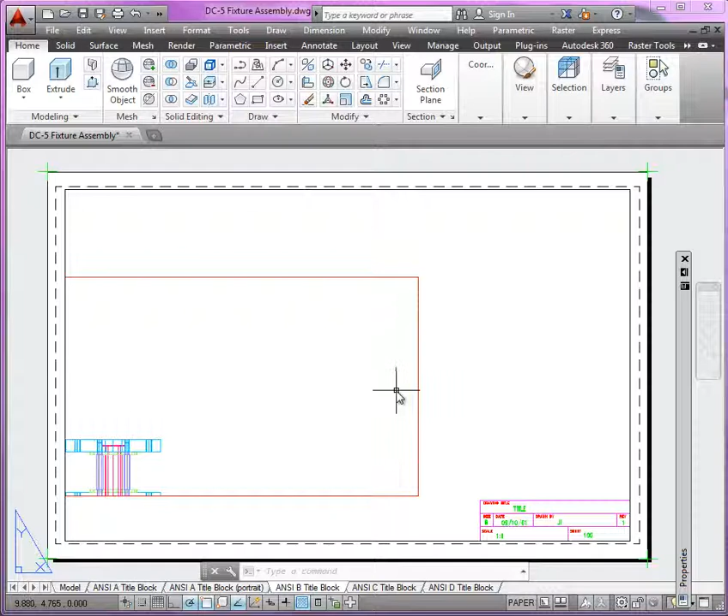So if we select that viewport, we could reposition it in the layout here. And remember, this is going to be shown as our exploded assembly view. Okay? We'll need to use solid profile to render the hidden and the visible lines and update the layer properties to attain line weight. You'll notice here too that you have two different tables, but actually they're based on the same table style. You'll notice the one for the hole tolerances, this is going to be top down. The bill of materials is going to be bottom up.

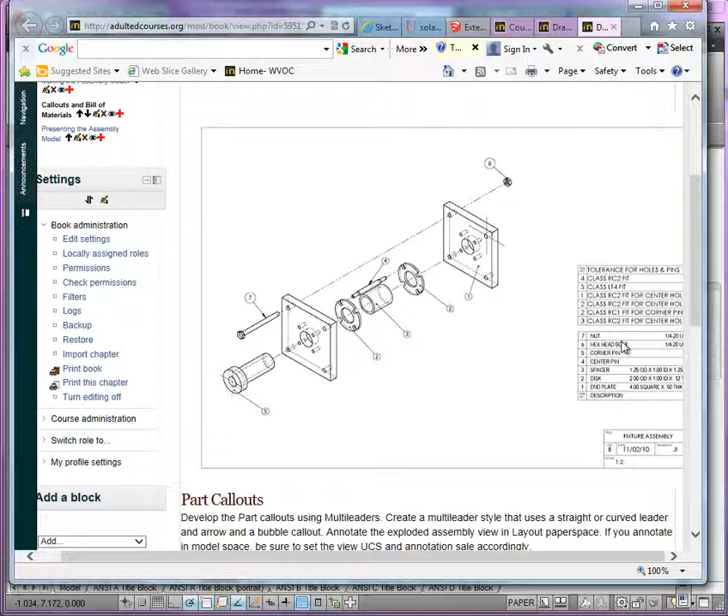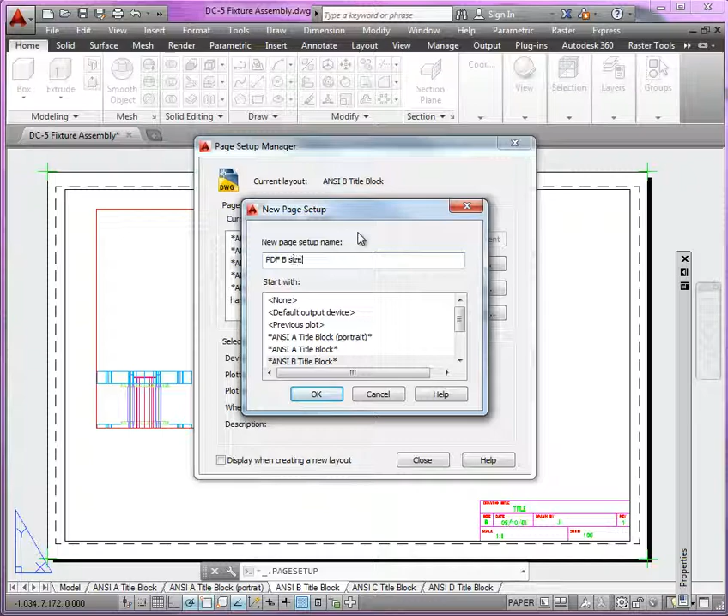All right, so let's take a look at some of the formatting that we'll need before we begin. So here I am in the B size layout. First thing I want to do is take a look at my page setup. We're going to make PDFs, so we want to make sure that we create a new page setup here. And we're going to use the DWG to PDF printer. So we'll just call this PDF B size. We'll use DWG to PDF printer.

We'll use the expanded B size, 17 by 11, extents, center of the plot, scale 1:1, and we'll want to use the HP Plotter Mono Student 2 color table. These are our class standard tables. This one allows us to print in black and white. Okay, you can also check display plot styles. This will make sense later once we've rendered the views, so we can see the line weight based on the colors that we selected for the layers.

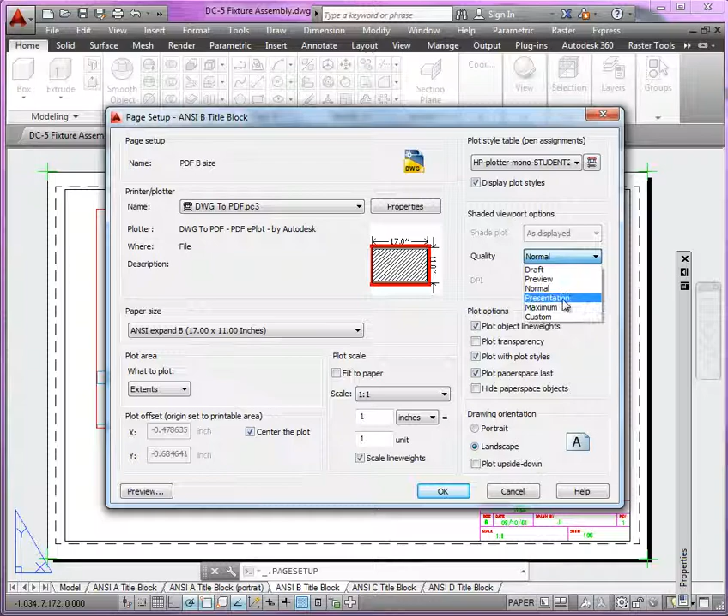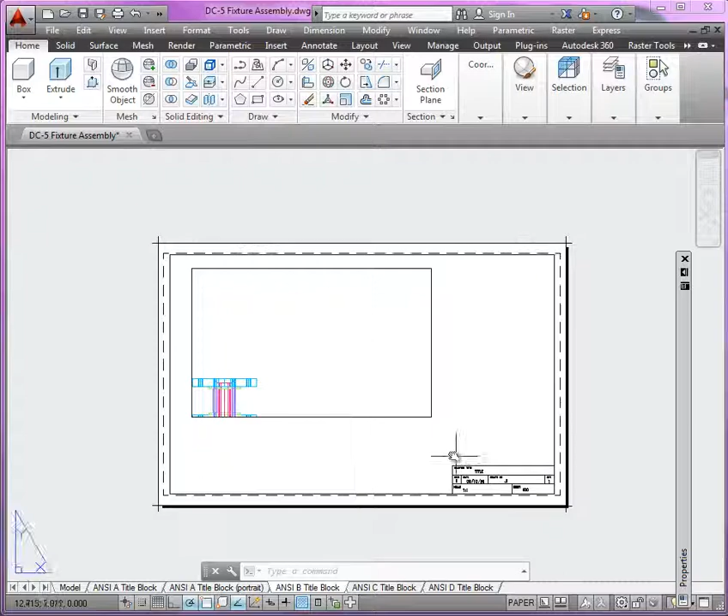The quality here, let's use presentation, and then double check your orientation. If you do a quick preview, even though you don't have anything there, you can at least verify that you have the entire title block. Right click and exit, save your page setup, set it current for the current layout selected, and close. All right, and you can see some of your layer information should be represented in black and white, as you can see there. Okay, so returning to the viewport here.

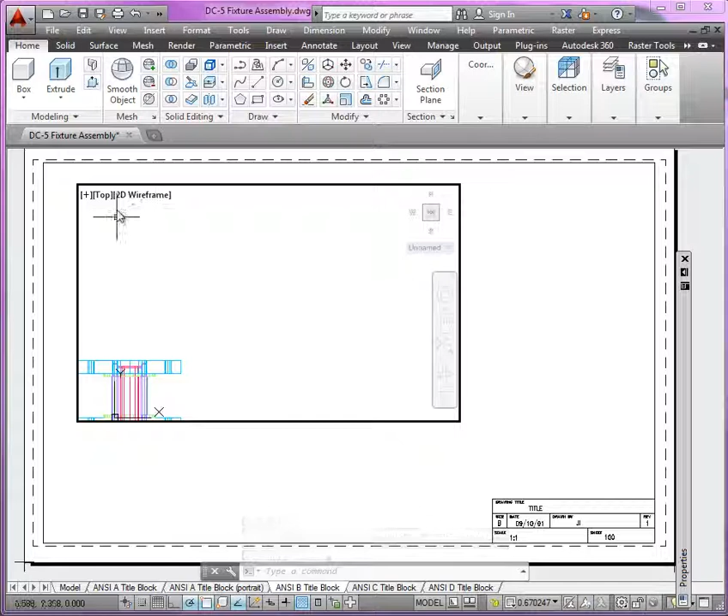All right, let's set up the view here, and then we'll come around and start working with the callouts and the tables. For our view here, what you'll want to do is double click to activate the model space. You can use your navigation wheel here, or you can use the options in the top left corner of the viewport. First, if it's easier to see it in conceptual, let's do that. And let's set up a southeast isometric view.

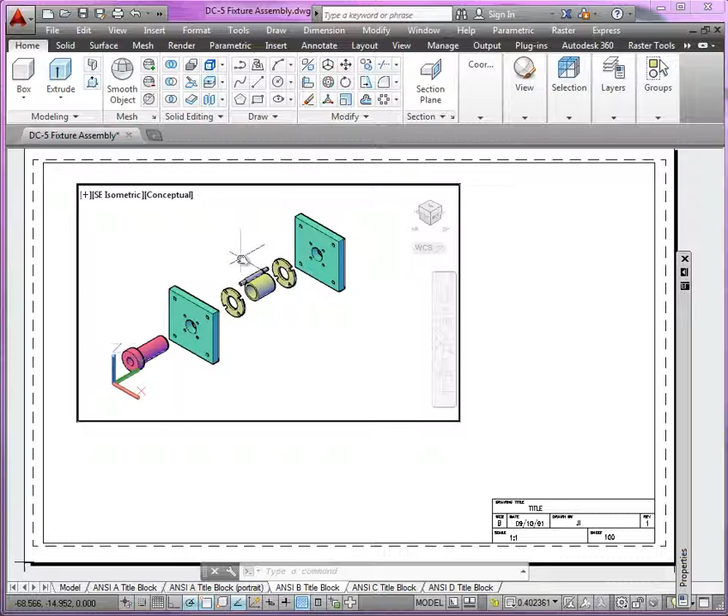Now notice it does a zoom extents, and what we want to focus on here is going to be the exploded view. Now the exploded view does not have to be to scale, but you can see here if we set it, for example, 1:1, that's a pretty big size representation. We set it 1:2, that should be adequate right there. Okay, so make sure all the layers for your model are shown here. Okay, and this will be the view.

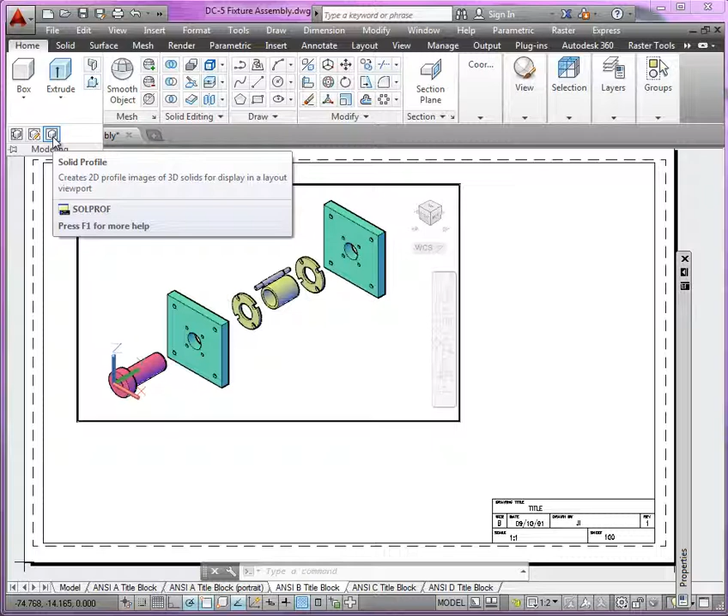In order to see the visible and hidden lines, we'll need to render the view. And we'll do that using the modeling panel, and in this case using the solid profile command. What we're able to do here is select all of the solid models, right? And keep in mind each of these is on their own respective layer. When you hit enter, take a look at the options there, and basically you're projecting all the lines, so just hit enter continuously through all of the prompts.

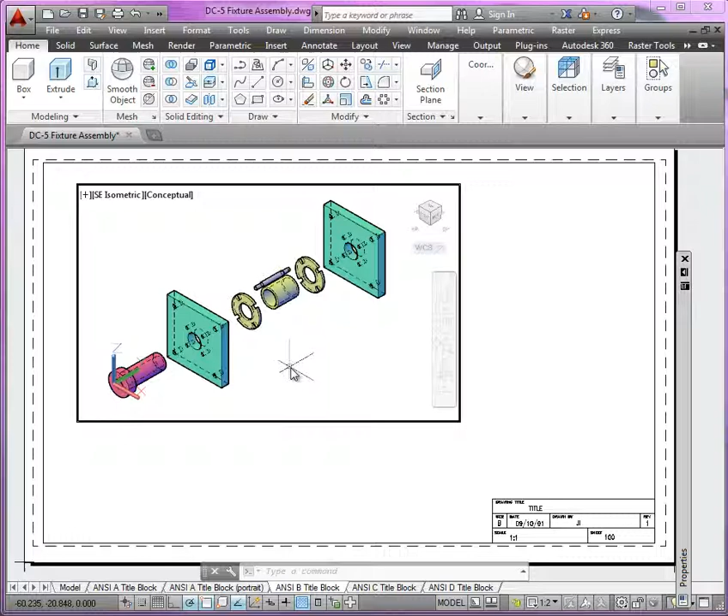Okay, now you'll see some additional line work, but in order to see it clearly you'll need to freeze the component part layers, but freeze the layers only for this viewport. Okay, so take a look at layers over here, and find those 3D component layers. You can see here's the spacer, and we'll use freeze for this current viewport only. The end plate, the disc, the corner pins, and the center pin. Okay, now I'm going to lock the viewport and zoom in.

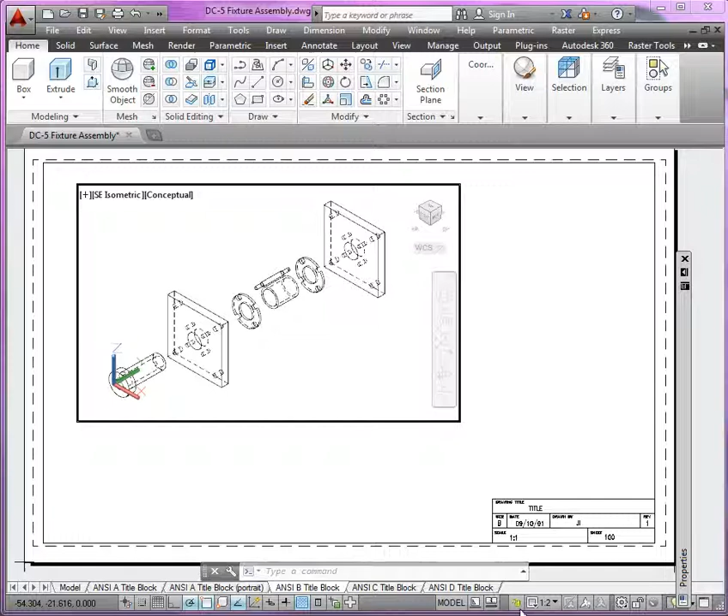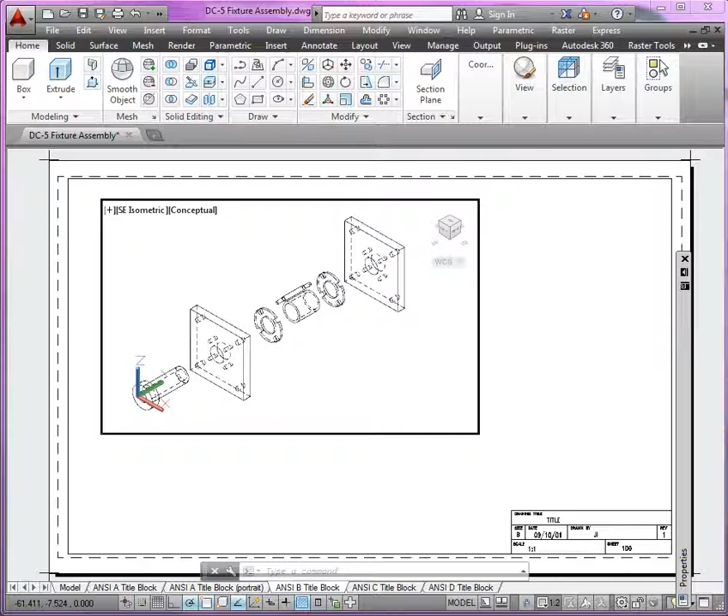Currently you will see no difference in line weight, right? And what AutoCAD has done is, if we return to layers, you can see that it's produced these PH and PV layers. If we open up our layer manager, we can work with this better. Okay, locate PH. You can see those are the hidden lines. Set that to the blue color.

Oh, where did the layers go?

Oh, there they are. Okay, and then for the PV layer, or the profile visible, set that to cyan.

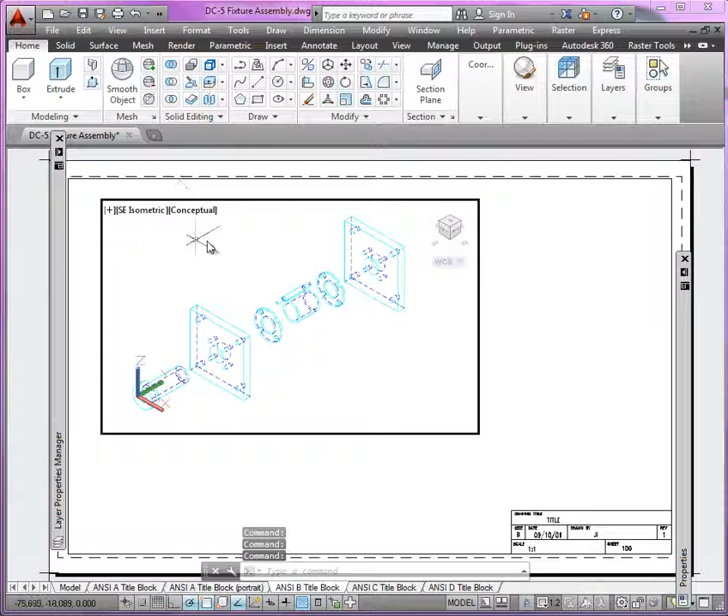Okay, now if I use view and regen all, let's try that again. View regen. Well, these should turn to black.

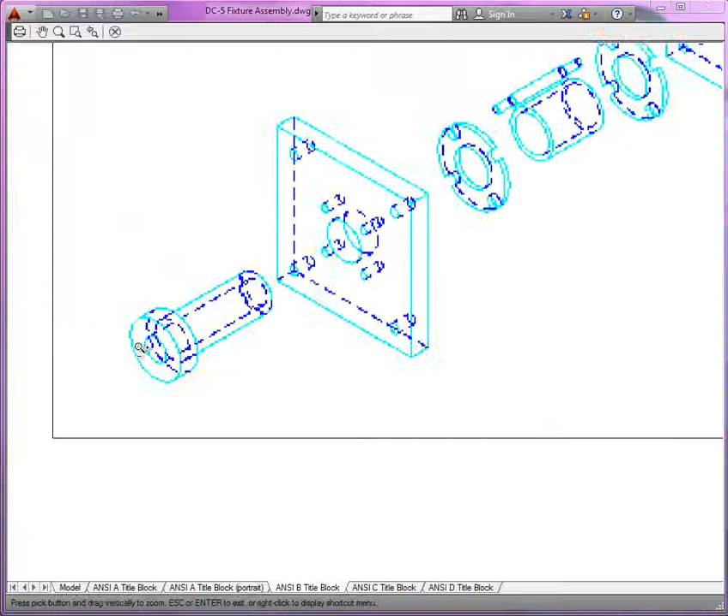Okay, we should see the line weight there. Actually, if we go to output and preview one more time, here's where we would see that. Now, if you recall, the reason why we don't see it in black and white is because if you activate the viewport here, you'll notice it's still in a 3D display style. It's conceptual, it's for 3D. You won't see your plot styles this way.

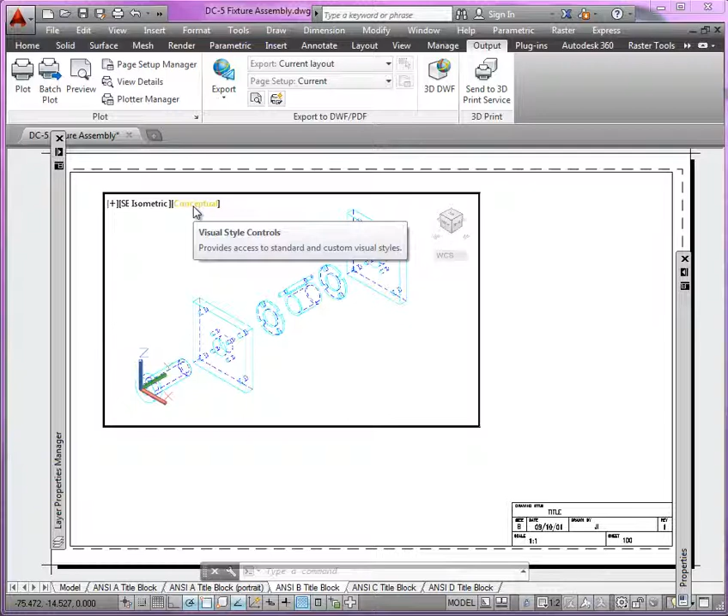So make sure we set this back to 2D wireframe. There you go. Now, if I zoom in, you'll be able to distinguish line weight based on your layer colors. That's if you have the line weight show on.

So if I zoom extents here, I can see the entire view, return to the paper space, and now we can turn our attention to formatting the multi-leader styles and also the table styles that we're going to use.

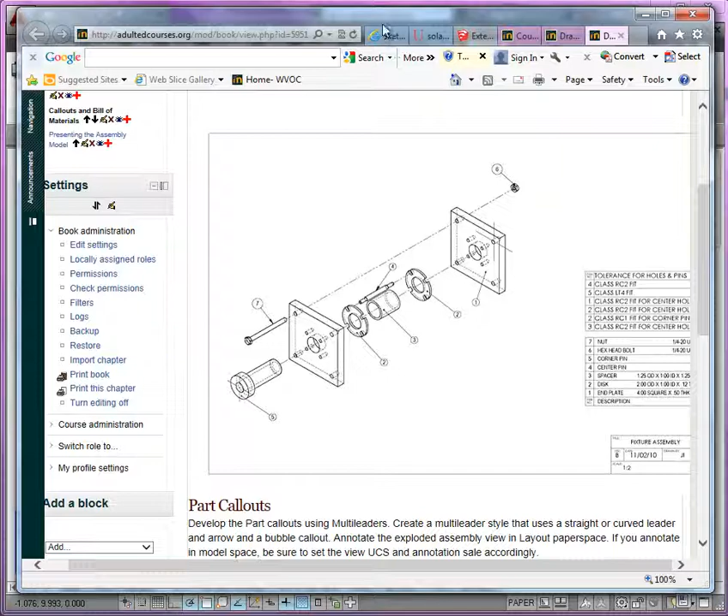For the formatting of the multi-leader style, you can see we're going to use this BOM callout, this bubble with an attribute that we can represent as numbers or letters if we like. You can see that we can show arrowheads or dots for our arrowheads. So it's really up to you, the style that you want to show. But let's take a look at the formatting for that, as well as for the tables.

Return to your Annotate tab, and you'll see your multi-leaders. Go to the multi-leader style manager. Now, one thing is this: we can create a multi-leader that we could just use in the paper space, or we could use a multi-leader that we use in either space. If we're going to use it in the model space, we've got to make sure that it's annotative.

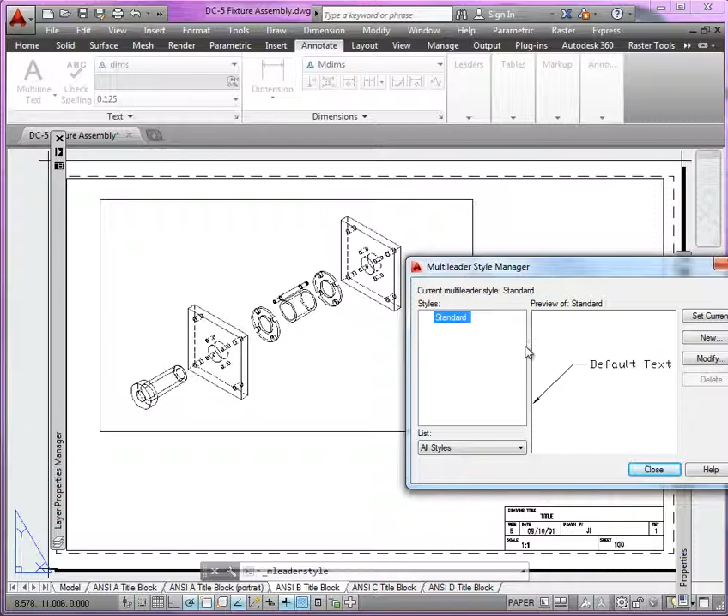So if we create a new multi-leader style, you can see here we can make it annotative. We can start with standard, that's fine, and we could call it BOM or BOM callout, and continue. Now, you'll notice we have leader format here.

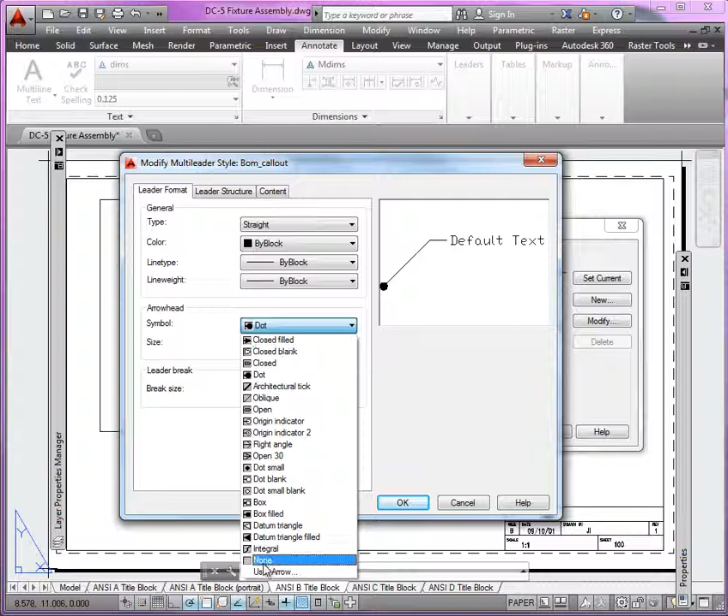You'll see we have straight, we have spline, as you can see there. And then down here, arrowhead, we have closed filled, or something like a dot, or any of these other arrowheads. Just use something that's appropriate.

You can see there's dot small, and there's dot like that. You can use the default size or adjust it as you wish. If you look at the leader structure, keep the defaults as you see here.

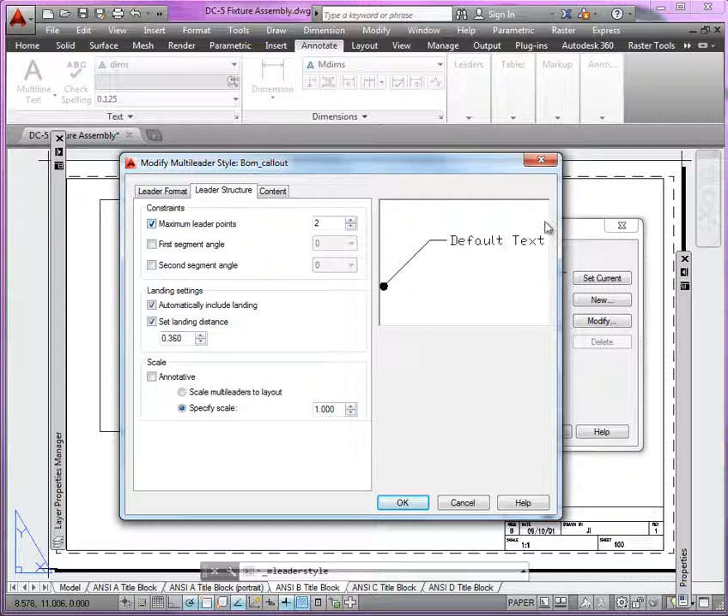We have 2 leader points, so we can pick where the leader goes, where the leader finishes, and then it'll create the bent leader line and attach what we're going to use as a block.

So for that, if you look at content, you can see here multi-leader type. Currently it's set to mtext, but what we're going to do is we're going to use a block, and now you can see your options change.

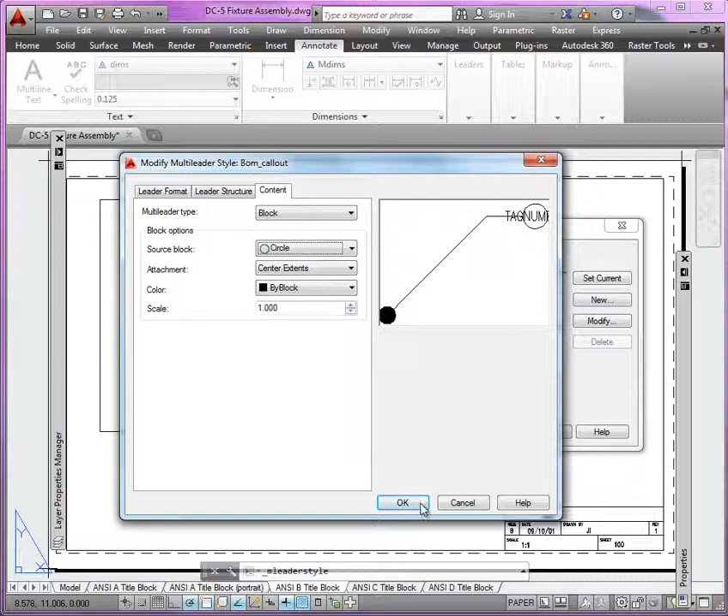If you look at source block here, what we'll be able to do is you'll have your selection here: hexagon, triangle, box. We'll use a circle. Now, these are predefined blocks with attributes. You can see there, tag number is the attribute. Alright, and we'll click OK.

And this will be our multi-leader style to call out all the parts.

Let's make sure, let's modify one more time. Let's make sure that we made it annotative, right? Let's select annotative there. Make sure it's annotative. Click OK. Now you can see the annotate symbol.

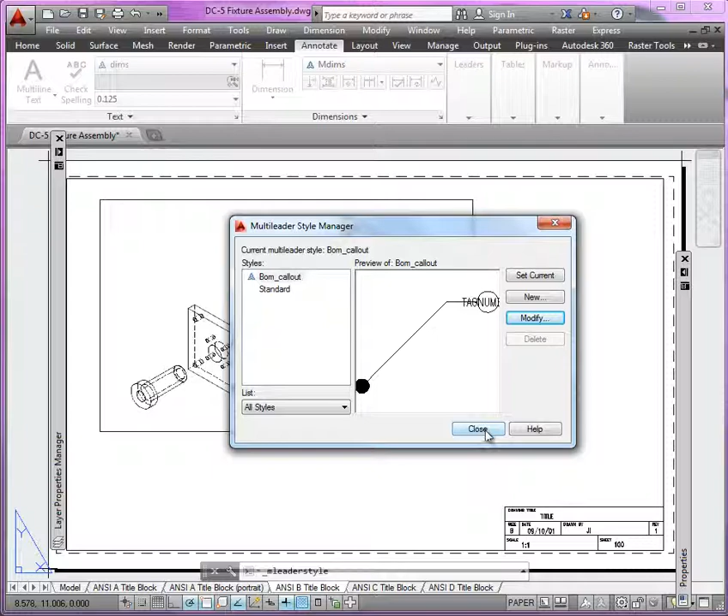All right, and close. Now, before we start doing the bubble callouts, let's go ahead and take a look at the table styles too. So, taking a look again at the Annotate tab, you can see here we only have a standard table style, but we'll take a look at the Table Style Manager.

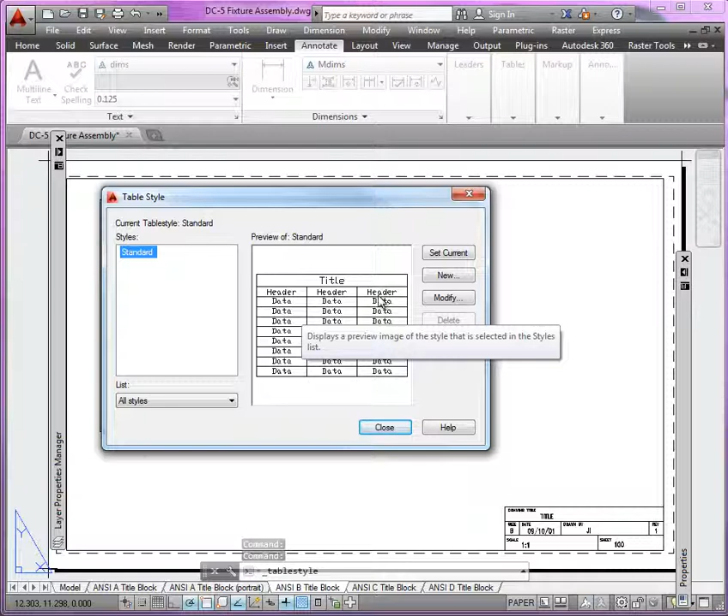And the idea here is that we're going to create a style that defines the properties for the title, the header, and the data cells for our table. So if I start with New, I'm going to call this BOM.

Okay, and continue here, and you'll see on the left side, the bottom left side here, you have a preview. Also, you'll notice here table direction. So this has to do with the style.

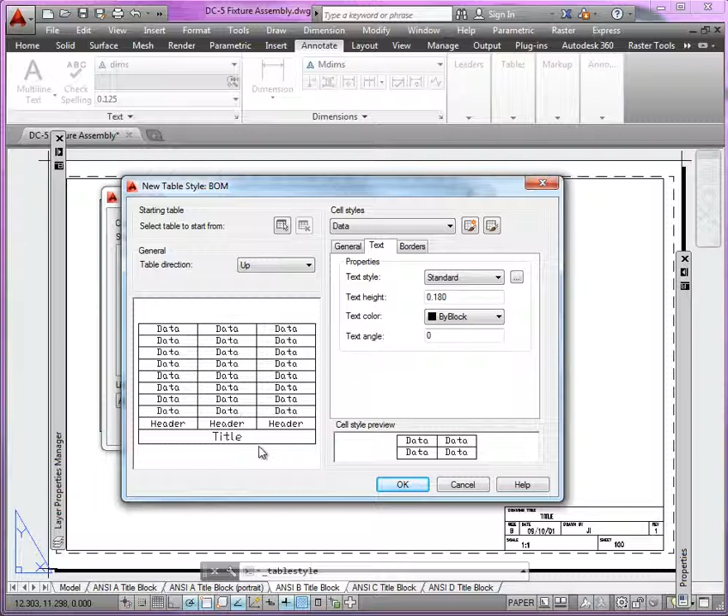You'll notice here the table direction is up or down. This is the orientation for our BOM table. It's different for our whole table. So what we could do here is use up.

Take a look at the cell styles, starting with title. Okay, we have general, text, and borders. Now, even though we're not going to use the title for either of these tables, let's just go ahead and define the properties. You'll notice here we've got alignment, middle center, the text. You can see it's just using standard.

But if you look at the options dialog button right here, this will bring us to the text style manager. This shows us all the different text styles that we have in our current model. You'll notice here, dims. Dims is a text style that is 0.125, and it's annotative, and it's using Romans.

Let's just say we wanted to create our own text style for tables. Here's what we could do: we could create a new text style. We could call it table text, for example. There's our new text style. And we could decide this is going to use Arial, for example.

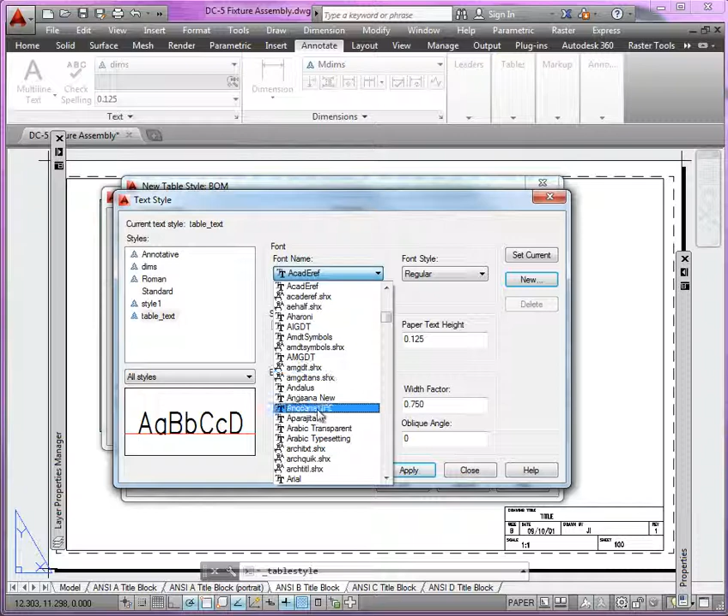So we locate Arial text style there, and we could define the paper text height as 0.125. We can do other effects here like width factor or even oblique angle. And we could create multiple text styles if we wanted them to vary for the title, the header, or the data cells.

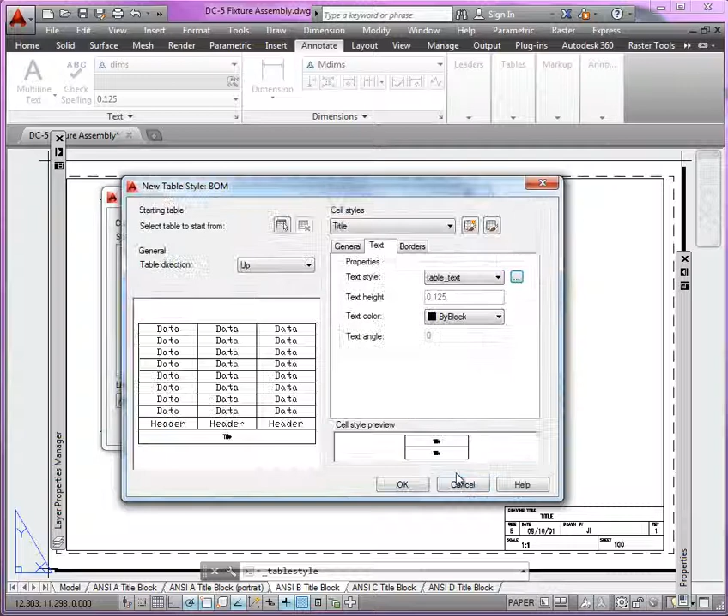But this will be just a generic text that we'll use for all aspects of the table. Once we've defined those properties, we can click Apply, Close. Now, back into our Table Style Manager here, you can see I'm in Titles, adjusting the text. You can see it's already set to Table Text.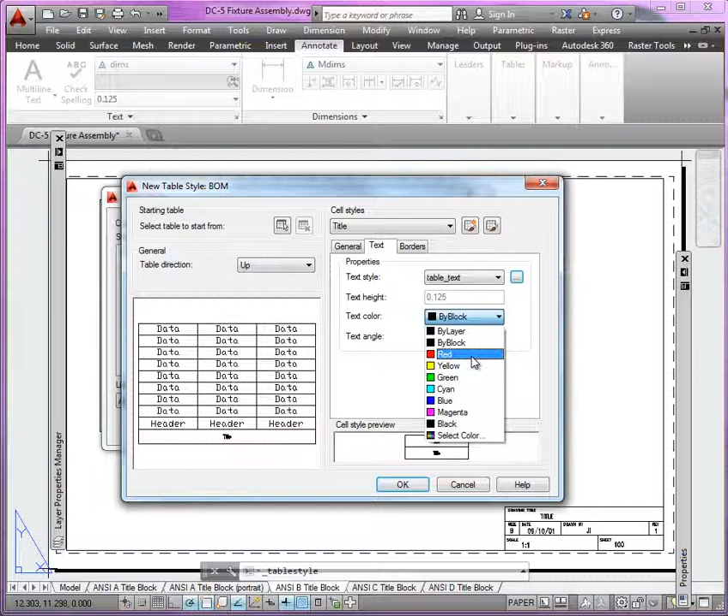And here also, we can change the color independent of the layer on which we place the table. So you could do this so that if you wanted to emphasize the text, or vice versa, wanted to emphasize the table, you can have different line weights based on the color. So here if I wanted to, I could just change it to red, really thin or light line weight, or even to something like the lighter line weights I have here with color 8 and 9.

Borders, we want all sides to be enclosed with a border. And then also you can see here you can change the color of the frame of the border independently of the layer on which the table is created.

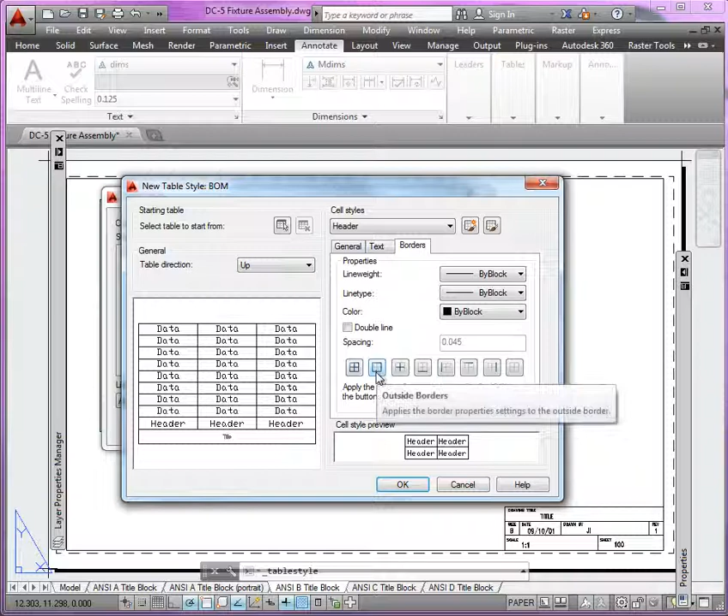So that's just title. Let's switch over to header. Once again, you can look through all of these options. Put a frame around that cell. Take a look at text, we'll use again Table Text here. General, you'll see its alignment is middle center.

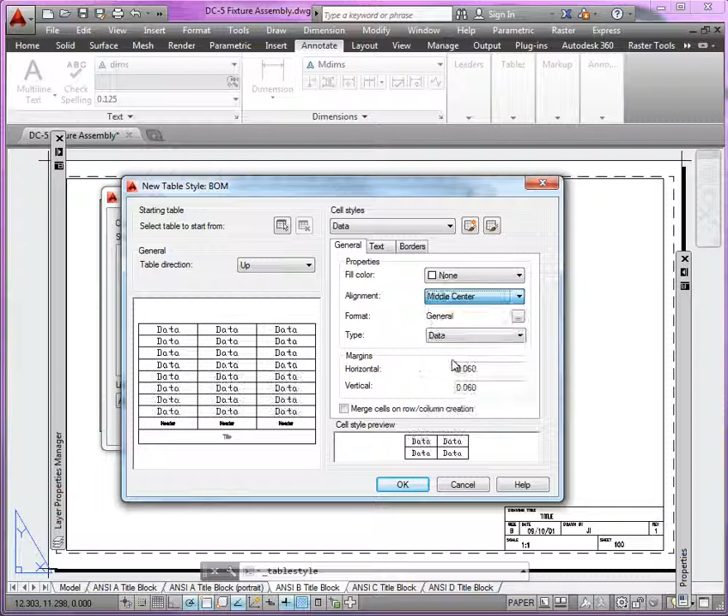We'll keep that. Switch over to data. Confirm this, we have alignment there. We'll do middle center there too. Text, we'll use Table Text. And borders here, we'll make sure that we fully enclose the cell with a frame. Okay, so this is just the table style for our BOM.

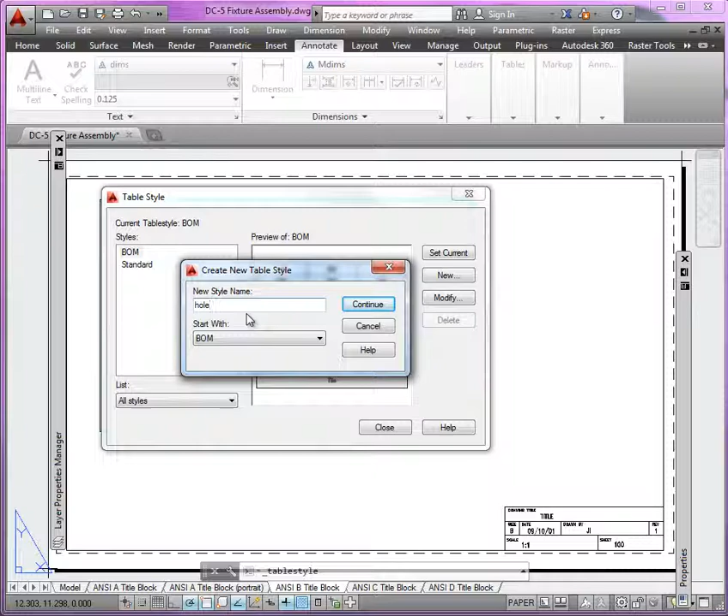If I click OK here, the only difference between that and the hole tolerance is this. Click New again. You can see we're starting with the same BOM table style, but this one I'll just call it 'hole' for the hole tolerance table. Click Continue. The only difference here is this one is set downwards, right, top down.

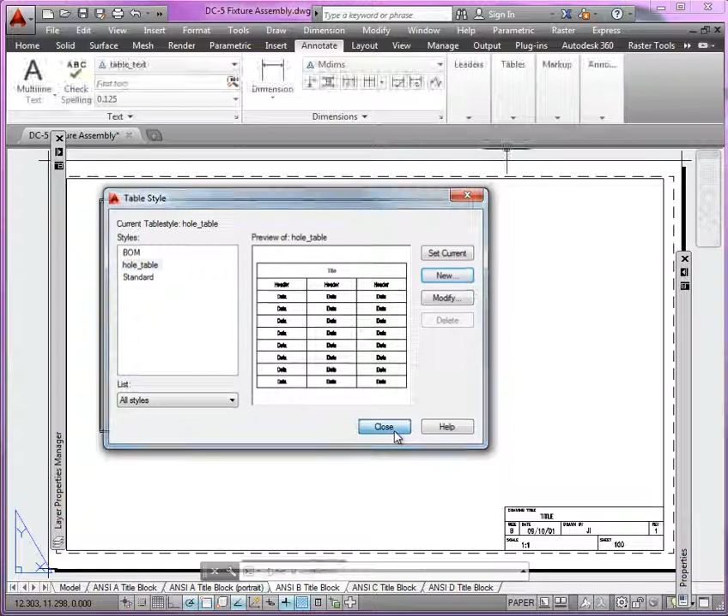So here you can click OK and proceed, just go ahead and click close, and now you can see I have in my table drop down menu both BOM and hole table, and over here in leaders I've got my BOM call out. Now we're ready to annotate.

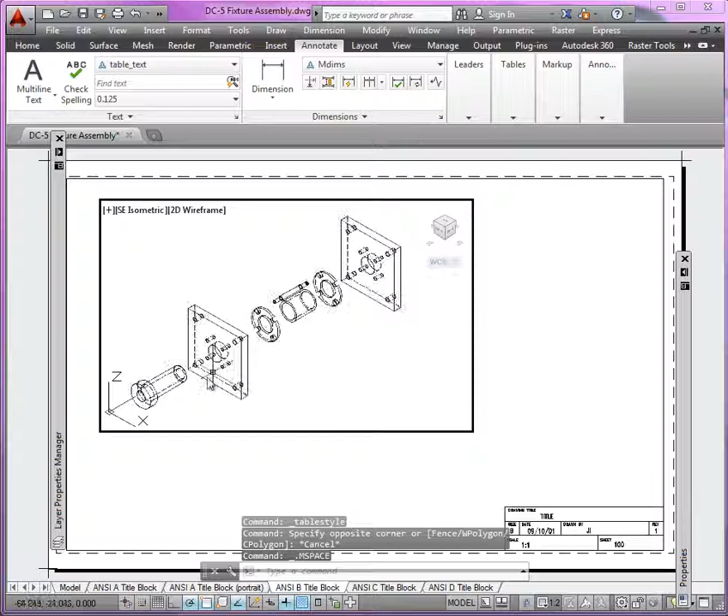So if I'm going to do the annotation for the parts, I'll go to the model, make sure the view is locked, zoom in and start annotating your components. If we start first with the end plate here, go to leader, we already have it selected, use multi-leader, and this is where you can specify do you want to specify the arrowhead first or the landing first.

Now let's see, it's already set to arrowhead. The other thing I forgot to mention here is let's check the layer. So let's escape first, okay, let's go to home and let's check our layer. You can see right now, since we haven't been drawing anything, that we're on the 0 layer. When you're going to do your annotations, you can use your dims layer, or if you have a separate symbols layer that you want to use, you can do that too. Let's just use our dims layer for this.

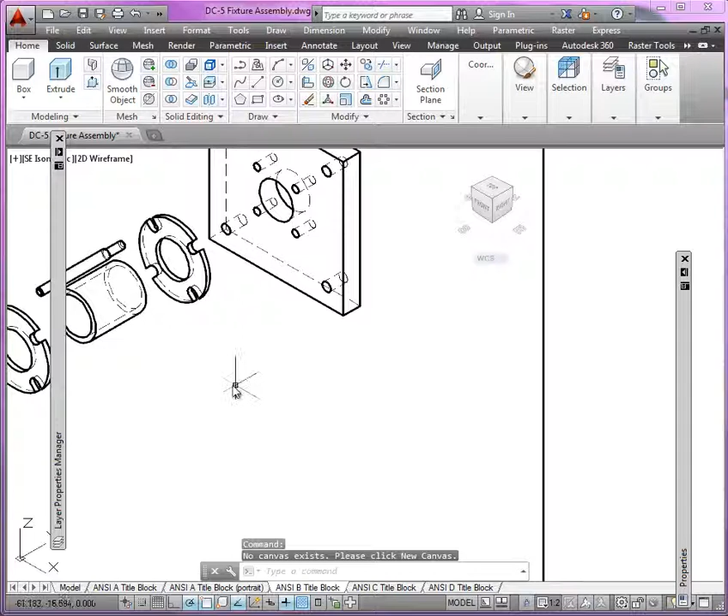Again, let's restart. Let's go back to annotate, leaders. You can see we have BOM call out. We'll use multi-leader here. Come to the object, click at the object, and as we pull away here, we'll be able to place our BOM call out.

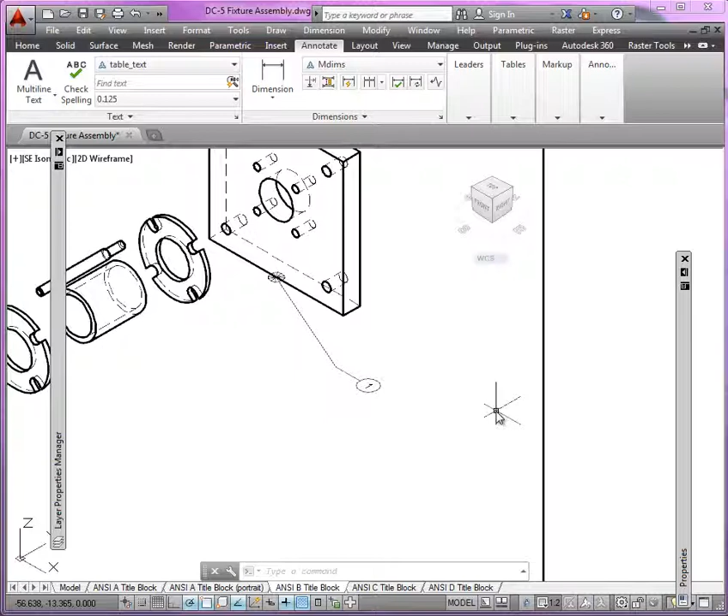Now notice, as I place it, what do you notice? You notice that that multi-leader is aligned with the UCS in the model, right? But what do I have here? I have an isometric view. So this is where, even though we have an annotative multi-leader style, this is where we actually want to put these annotations into the paper.

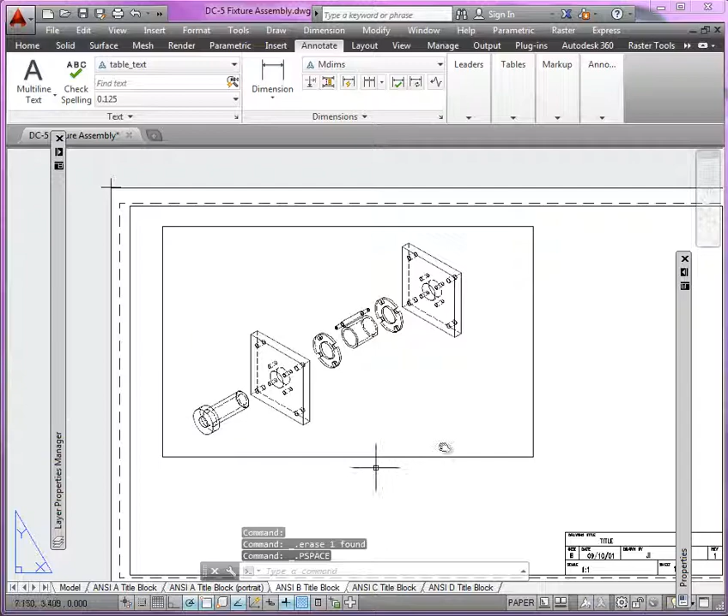So we don't have to worry about the orientation or the UCS of our objects. So still using the dims layer, let's actually switch back to the paper space, and what we're going to do is we're going to add those annotations right here in the paper space on top of the viewport.

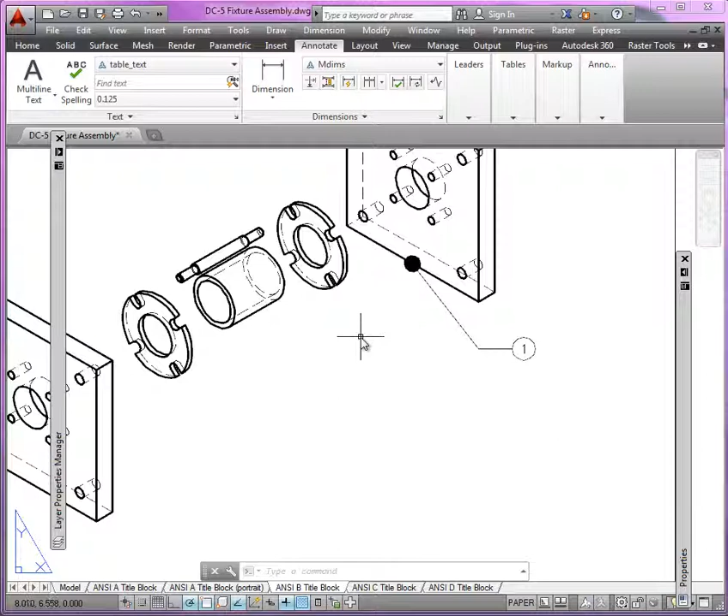Once again, if I go to multi-leader, I can select the object, and then as I place my multi-leader here, I can give it a number, call it number 1, and click OK. Now you can see the multi-leader. Notice how large that arrowhead is, right? Because you're using multi-leaders, here's the other thing: as I continue, I can use copy and simply copy the multi-leader and apply it to all the other components there.

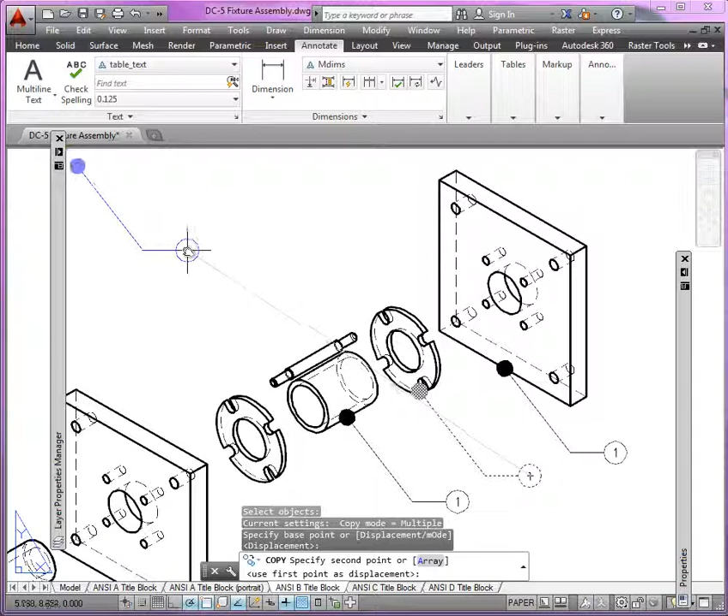Let's come over here to the center pin. Notice now, for the corner pin, I make a copy here and just put it way over here, opposite, and escape. If I grab that arrowhead and start to move it, notice how the orientation changes for the leader as well.

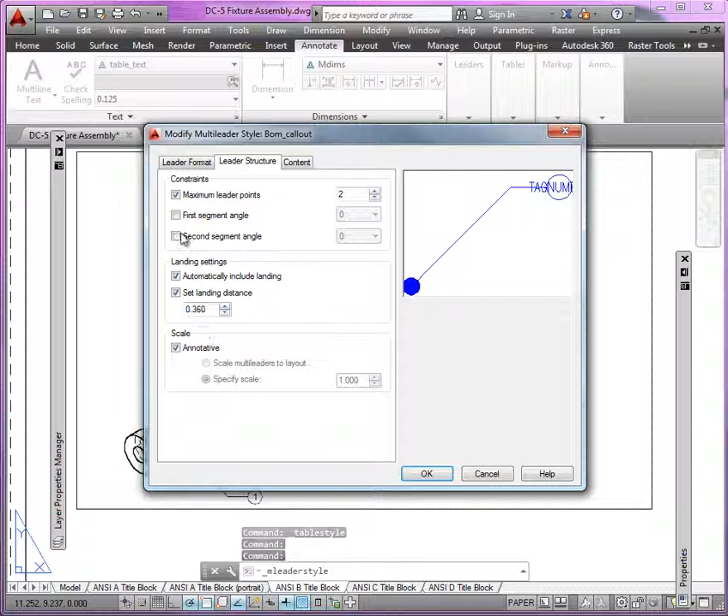Notice how big those arrowheads are. Because it's a multi-leader style, you can always return to the multi-leader styles to modify and adjust the leader format there. If we wanted to make it smaller, we could just do 0.125 and adjust, and you'll see all of them should adjust as well. That's why you want to use those multi-leaders.

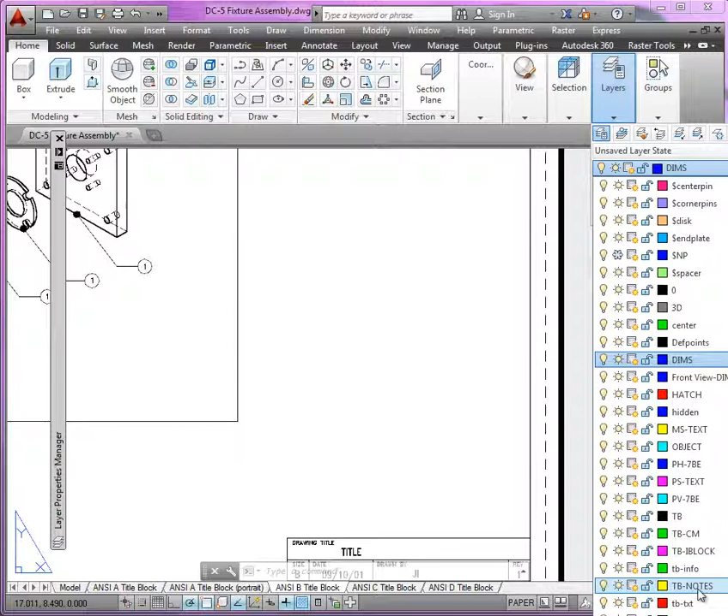Now, as we continue, I want to do the tables. Let's start first with the hole tolerance table. So again, if you have a layer for this information, let's say your TB notes layer or your paper space notes layer, you can see I have it right here. What you'll do is return to annotate, use tables, now that you have the table styles created.

If we're going to do the hole table first, let's make sure it's selected. We'll come over here and use table. You have a couple of options as to the way you're going to insert this table. You can define the number of columns, in which case we have 2, and then this will be the general column width. And then you have your data rows.

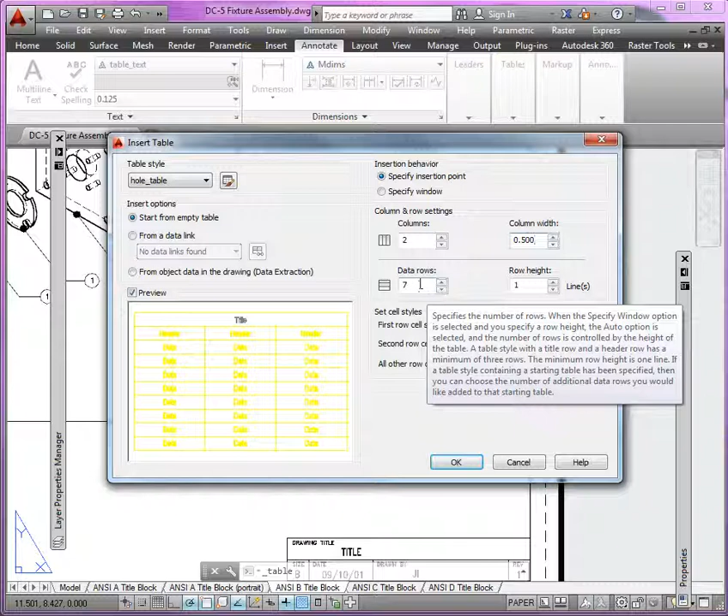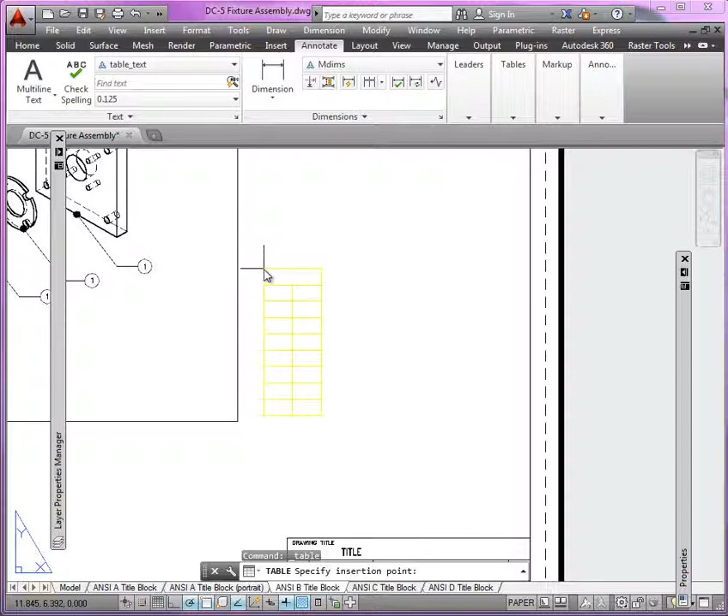So consider that you have your header, and then you have the remaining rows. I think here we have about 6, there's 7 there. I'm going to leave that there because I'll show you how you can add and remove rows as well. You can see here the set cell styles. If I wanted to change this, I could do it here, but I'm going to keep it in the defaults. Click OK, and you'll notice the table's already set to a certain size.

But once I place it, I can actually resize it. So notice, this is the title. If I didn't want to use it, what I could do is simply delete that row. Now all I have are my headers. You'll notice the grips that appear once I have the first row selected—look at this rotated rectangle. If I select this, I can drag it out and use it to fill my rows and columns.

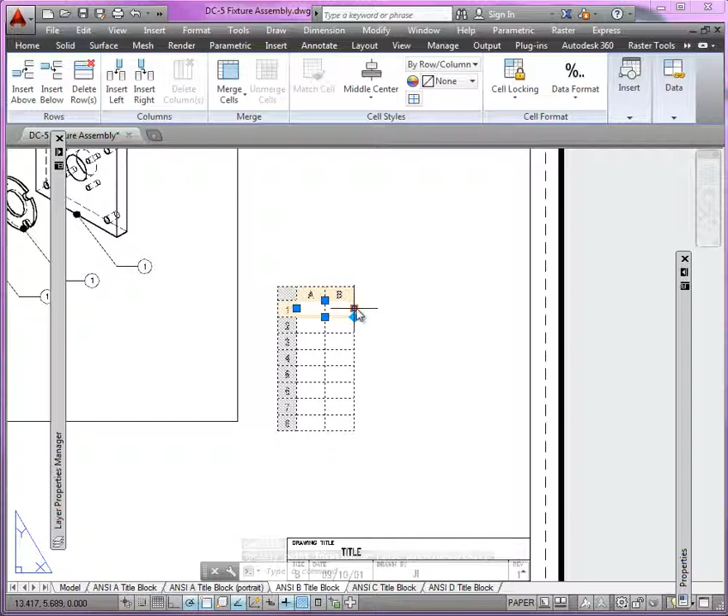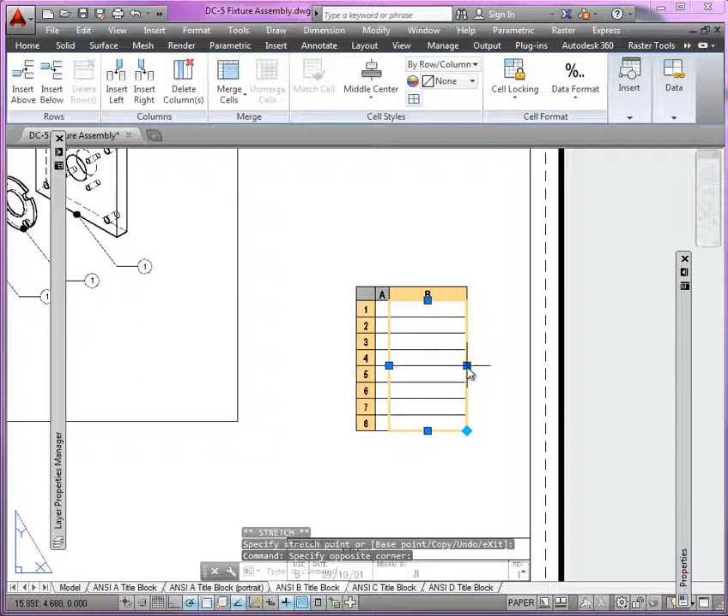But if I use this square one here, I can adjust the size of the table. So I can adjust the size of the column just by pulling these guys to the left and to the right. I should be able to select—here's the column width, there we go—and then pull to the right to adjust it. So you can play with that for a little bit to get the right size for your table.

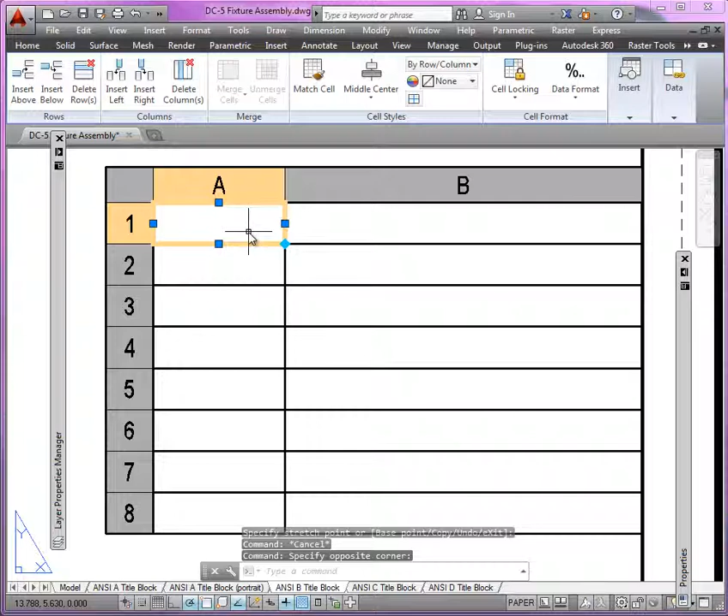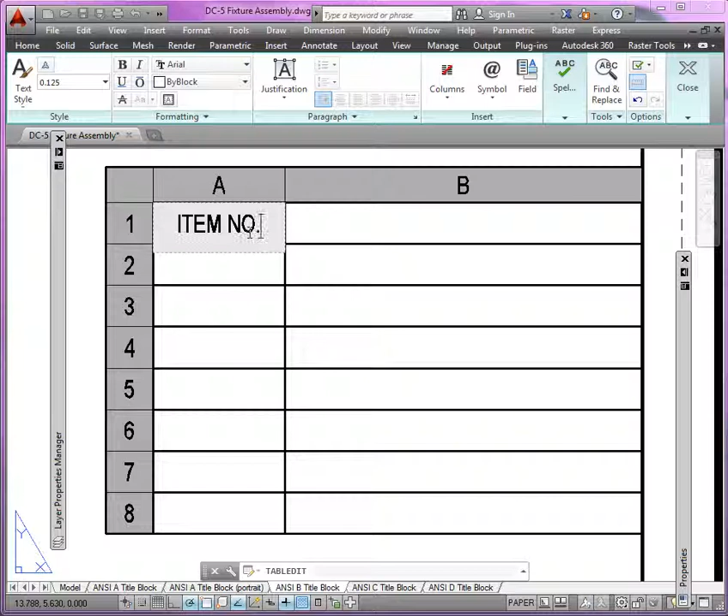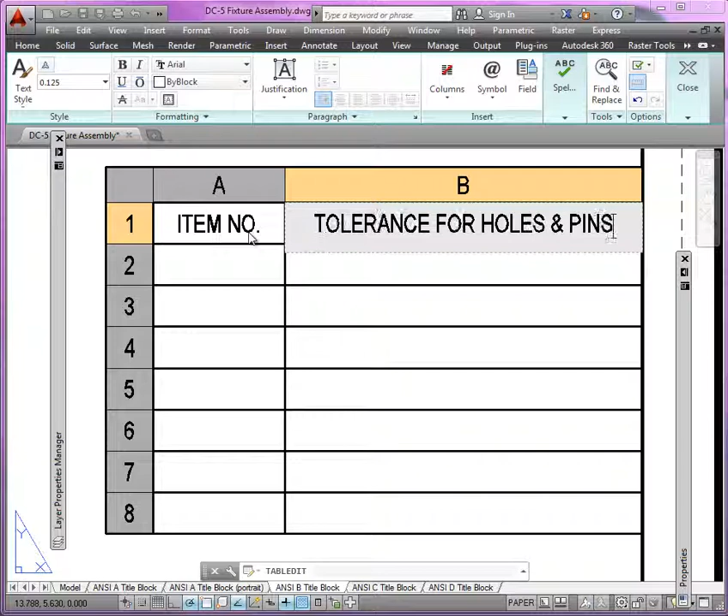And then you'll be able to go ahead and input your information by double clicking. So we have item number here. Hit tab to go to the next cell, and then we have tolerance for holes and pins. Then you could just input the information that's remaining there.

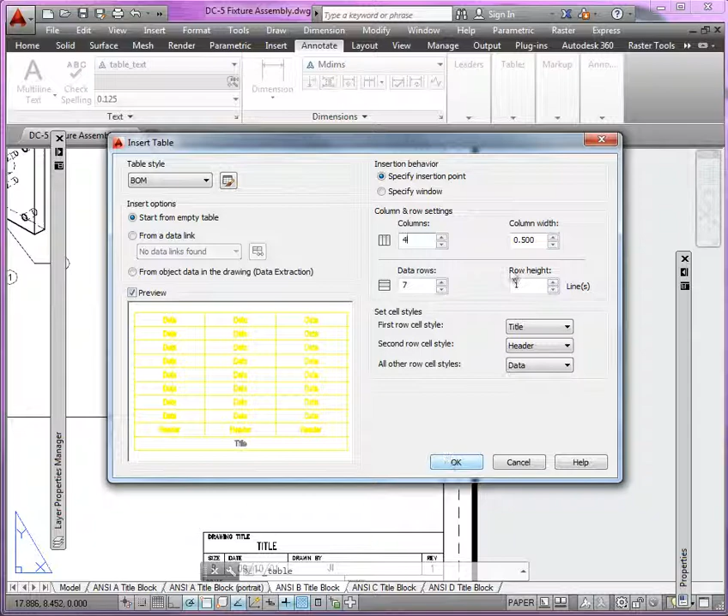Now, if I'm going to continue with the BOM table, you're going to make some space here, and what you'll be able to do is go to tables, change your style, select BOM, come back again and use the table command. Once again, you can determine the number of columns—we've got a total of 4 columns, a basic width, and your data row quantity and row height. Click OK, and you can see there's a basic table.

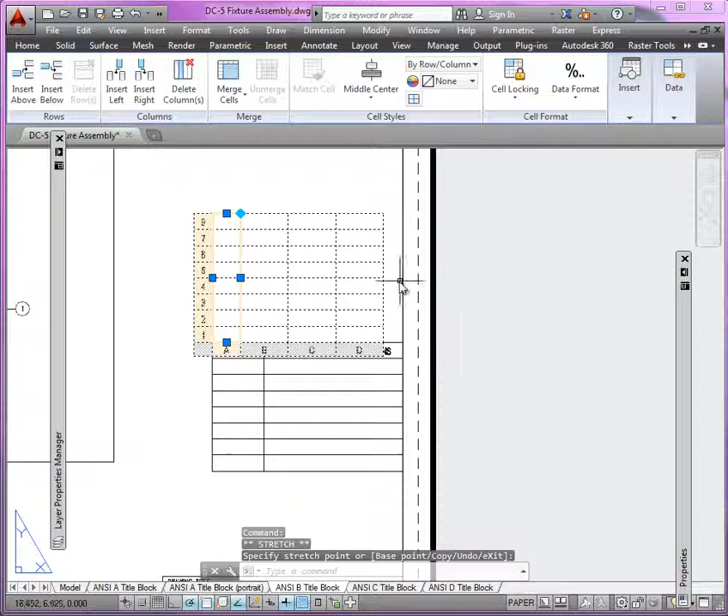Again, if I don't want to use this row, I can just select the row, right click, delete row, and then fill in my information there. You'll be able to stretch your table, select the column headers, and then use those square grips to adjust the sizing. Select the entire table by selecting the bottom left-hand corner there and using this rectangle to adjust the overall size of the table.

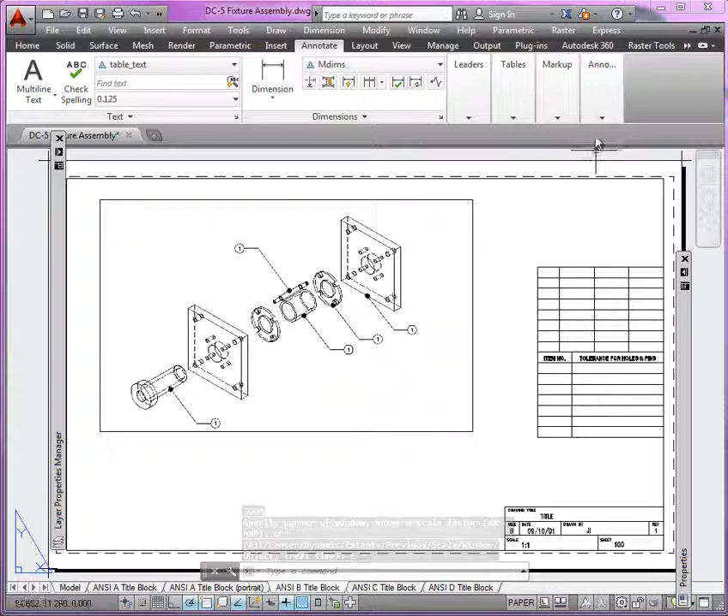So you'll reposition these, fill in the information, update your table here—your title block information block—and then finally make sure that you freeze your viewport layer so you can see your model floating in your view. You'll produce the PDF and then upload the PDF to the assignment page.

Alright, so that completes Drawing Challenge 5, the fixture assembly model and presentation.